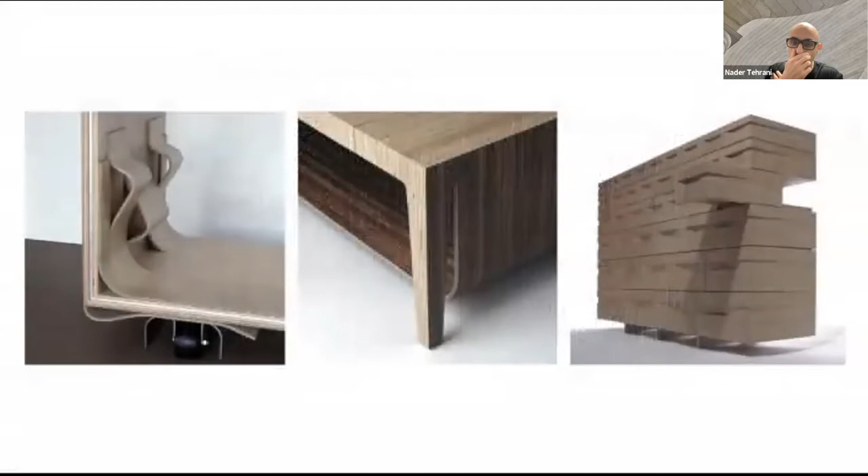My apologies, my voice is not very good today. I caught a slight cold.

In the context of our earlier work, we were working with wood blocks, stacked plywood on the one hand, almost as masonry units, but we were also working with the malleability of plywood, and the idea of plywood as a kind of laminate that is at once solid and malleable gets exposed in the way that in the bookshelf on the left, we can create a moment connection.

In the coffee table in the center, the massiveness of the aggregated plywood produces this stability of the wood in compression, while also displaying the suspended shelf underneath in tension below, and then more mysteriously, the shelving system, the drawer system to the right, where the structural system is embedded, concealed within the massive blocks of shelves, almost as masonry units.

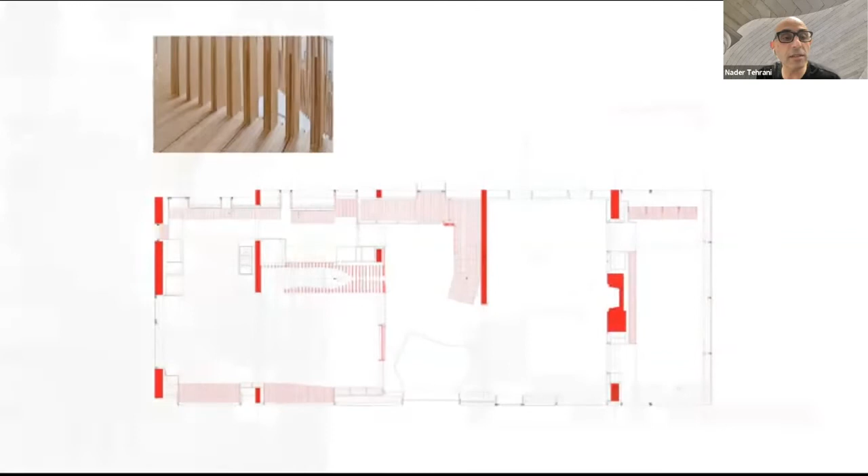As this gets translated to the scale of the house here in the Rock Creek house, we try to emulate the structure of the house. You can see in red the parallel lines that essentially run north-south are almost like party wall conditions that are then reinforced by the grain of the furniture and railing systems, essentially all running in the same direction, effectively doing two things. One, allowing the light and the sun to come from the south all the way to the north, but also blanking out the private spaces on the east and the west.

And you can see here very delicately behind that stair, a doorway to a master bedroom, which is sliding. Once the door is closed, you don't even see that it's there. This is not just a translation in section, but is part of our research. And that research happens in our own domain.

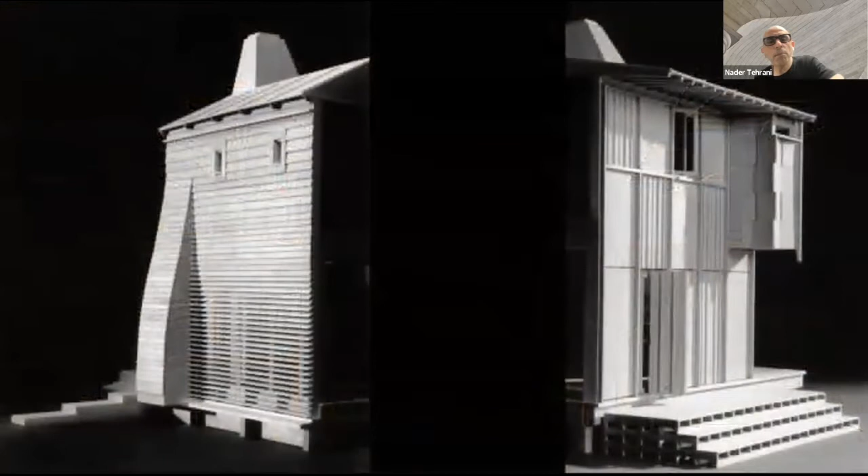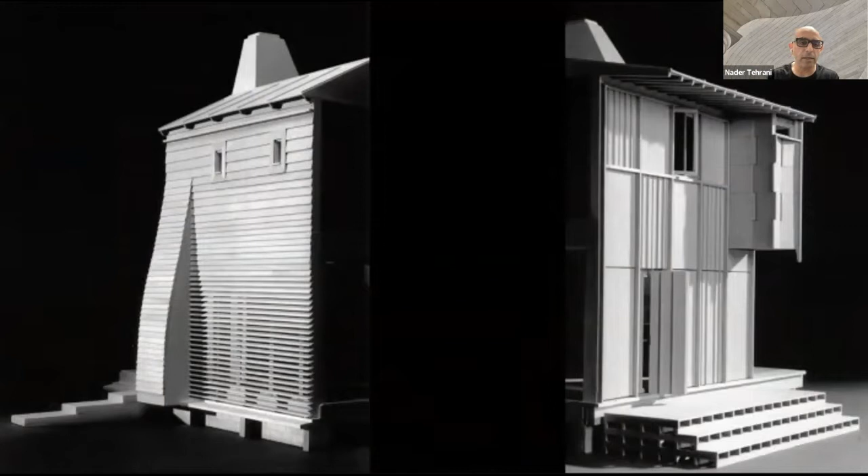But the grain, if you like, the tectonic grain that is produced by some of these structures was my reference to language originally. This is a model of the Mill Road house that was never built, but it conveys the different regional strategies that have been adopted by wood in the Americas, with clapboard siding on the one side and vertical board and batten siding on the other, using their grain to insinuate other possibilities.

In the clapboard, the idea of the clapboards rotating up to become shades to create transparency, drawing in the space beyond it. And in the folds of the board and batten, the idea that folding doors could make a similar transparency to the south. The actions that are part and parcel of these tectonics are a central part of our preoccupation.

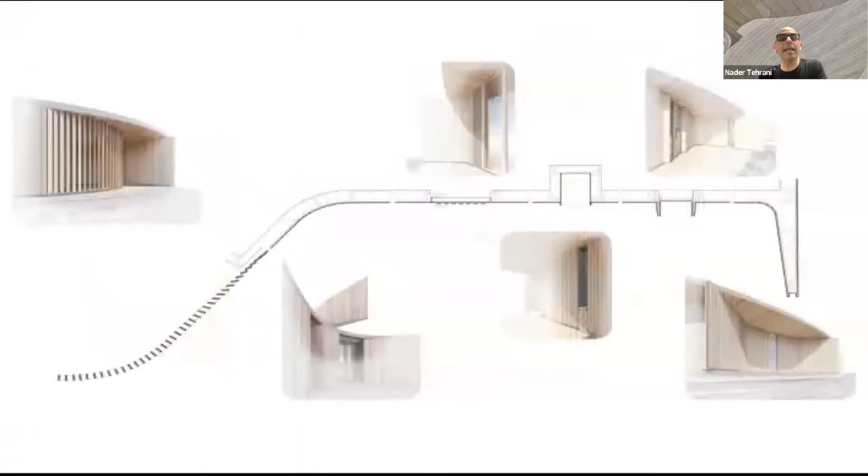That is, if we can do an architecture that doesn't have hardware, it is because the mechanisms, the elements of that architecture are what are used, or what are adopted in order to do precisely what we're trying to do. Here in the New England house, you can see the way in which the batten is peeled off to become the handle for the garage door that is concealed under this barn building. And so really the language of the part to whole relationship is what we work on.

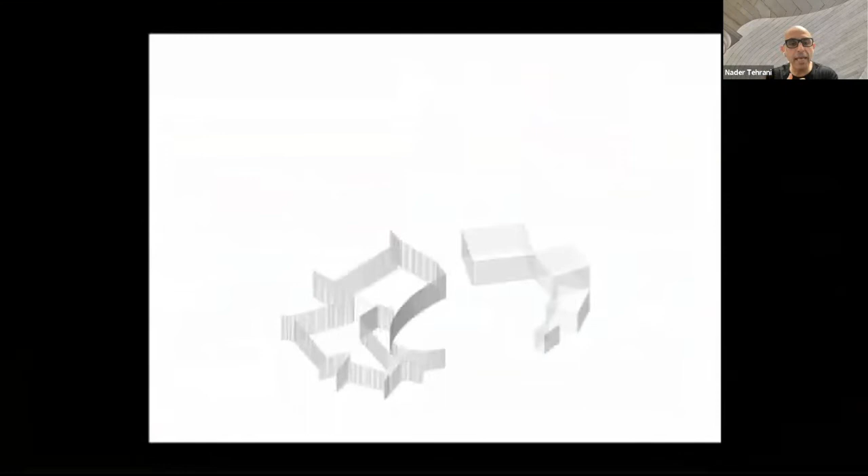The catalytic detail is what I call it, where you don't yet know what even the house or the building looks like, but you know the kit of parts and their relationship to each other that may be involved. So here in the New Hampshire house, the details were in a way conceptualized in advance, and then they became the vessel through which the container of this large courtyard building would be clad, and ultimately allowing for the framing of an important view through these tectonic elements.

And in fact, one inhabits this tectonics as one goes through the ruled surface of the entry condition and the portal. In other conditions, that cladding system is there to bring unity for the addition of another wing onto historic wings here in Beaver Country Day.

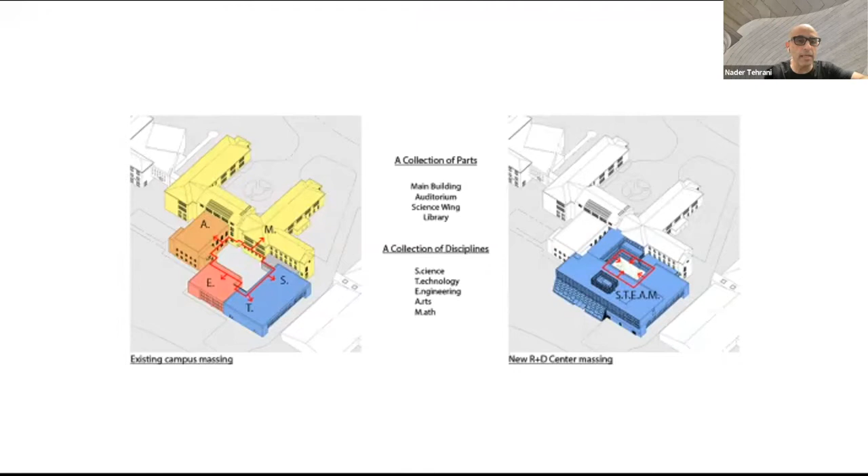So in fact, by working on a library, we were able to co-locate all of the different departments together, going from a STEM program with science into a STEAM program that includes the arts. And so in the second diagram, the idea of bringing them together comes with the imperative of developing a courtyard,

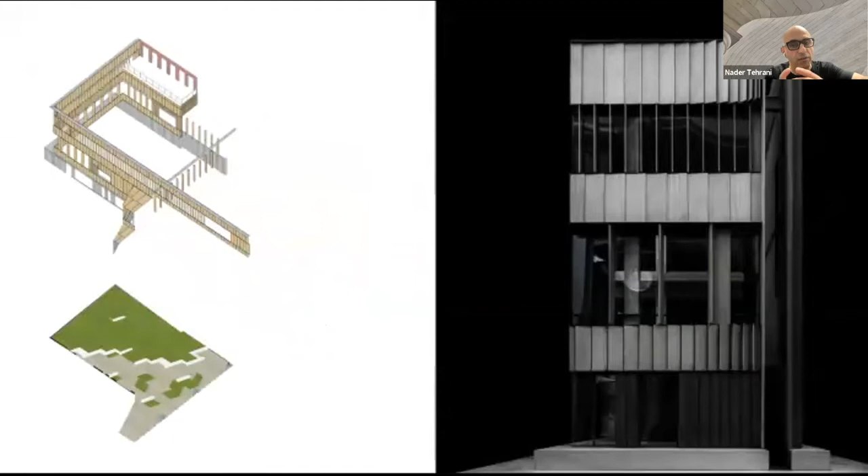in this case, where the wood elements essentially register the continuity of circulation that hides just behind them, exploding the library, as it were, instead of having a centered library, distributing the library between the sciences, the arts, and the other departments. The shingling then becomes part of the expression of these ramp systems, sometimes going clockwise, other times going counterclockwise. And the skin is a kind of an envelope that is a registration of this.

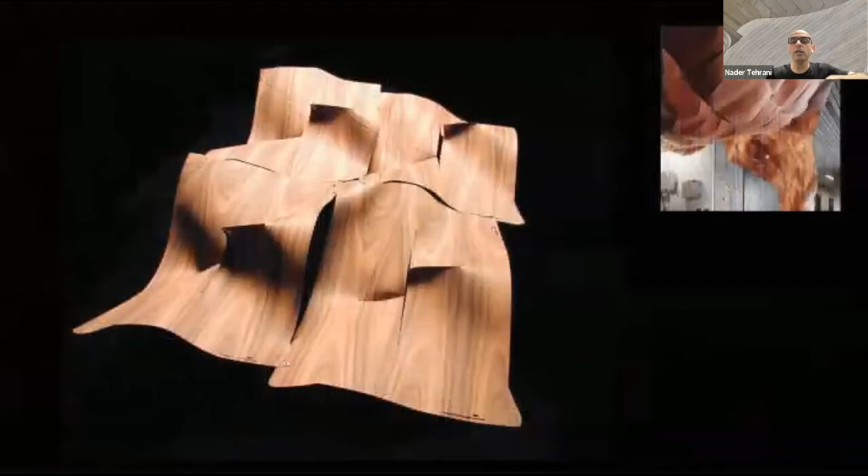Please look, as I will speak about this a little bit later, that the thinness of that laminate is as powerful to us as is the weight and the thickness in other circumstances. Here, a very, very early exploration of that thinness in the malleability and the pliability of immaterial ultramaterial, where we use the wood as the bottom chord of a bowstring truss that is able to span 20-some feet.

As you translate that thinness into the massiveness of mass timber, here you're looking at large LVL girders that essentially are 8 feet deep, spanning some 22 meters. The structure is inverted. In fact, the suspended studios hang from above and over the ground of the main hall. And so the tectonics gets lighter and lighter and lighter as you descend down into the structure.

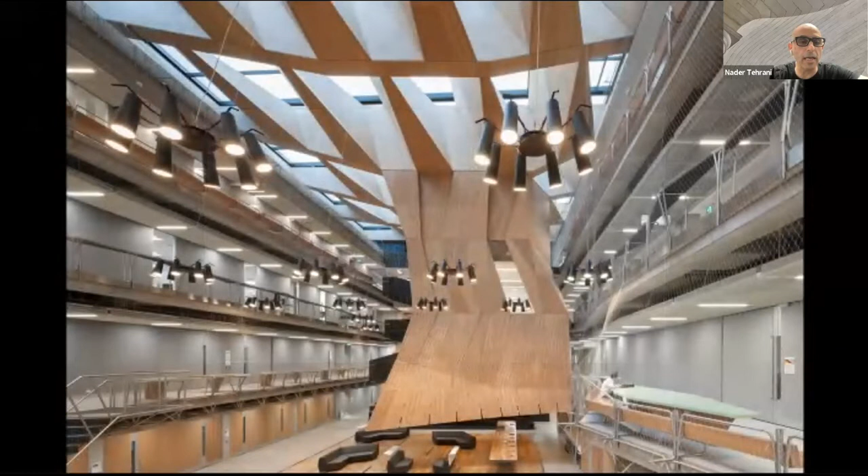The skylights essentially are a structural space, and contrary to a conventional building that is built from the ground up, where the rustication emerges from the base up, here the massive timber is reserved for the top of the structure with the thin laminar plywood at the bottom.

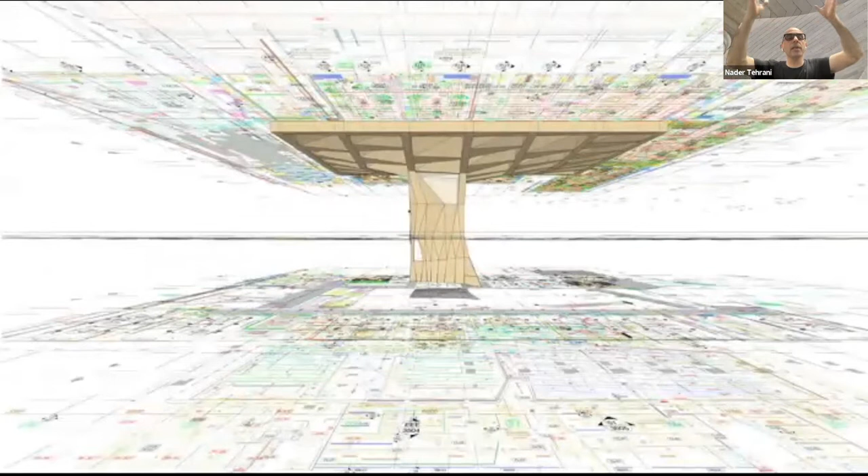The result of which is essentially a working drawing that builds the building up, suspends it back down, inhabiting spaces of the mass timber at the top, while also revealing the thinness, the acoustic thinness of those same skin conditions at the bottom in the lecture hall at the base.

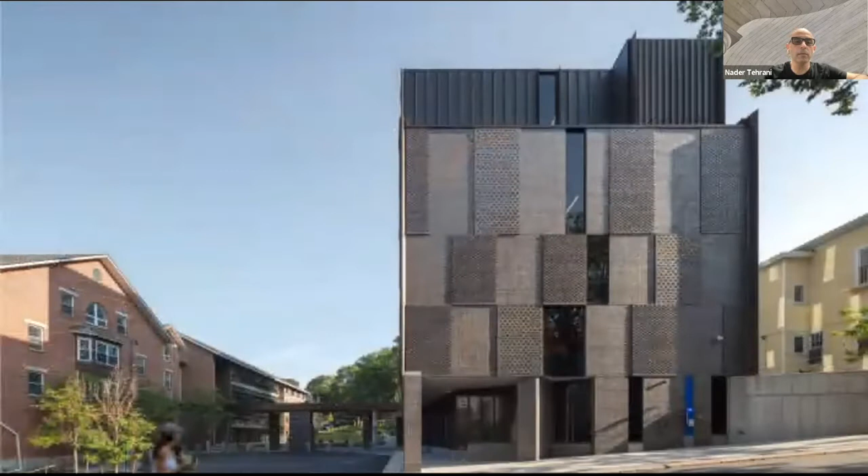Of course, not all buildings that are mass timber look like it. For the RISD building, the brick became a rhetorical mechanism to connect it not only to this history of the campus, but indeed the history of Providence itself. But the university took a big risk, not only in hiring us, but in asking us to deploy a strategy that was ultimately the greenest strategy that we could imagine, but without getting LEED credits for it

or any other kind of label. And so the contractors scheduled a 3-month framing period within which we could deploy not a pure mass timber strategy, but actually a hybrid strategy. The hybrid strategy entailed the collaboration of CLT panels in combination with steel I-beams. Why? And the reason for this is simple. Wooden beams would need to be deeper and thicker and are less penetrable for the mechanical systems.

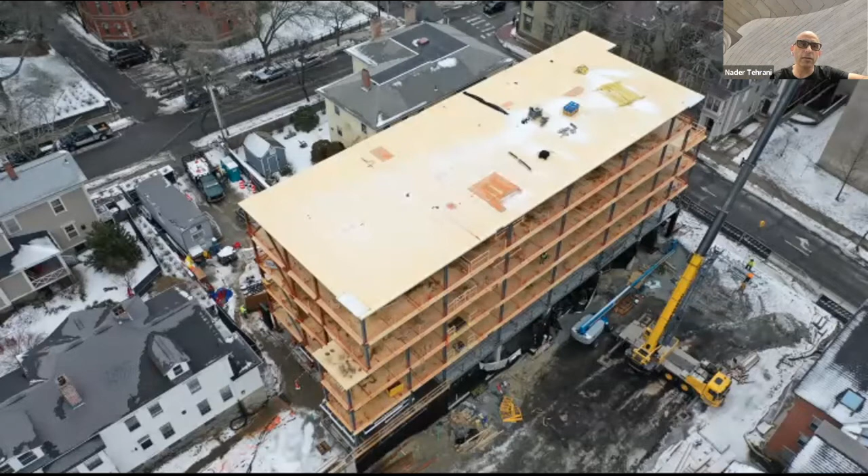And by doing a hybrid system, what we were able to do is to essentially prefabricate the entire building off-site and then just assemble it on-site, leaving no trace of construction on-site. The image you're looking at has no dust. It has no cuts of studs. It has nothing to it. Everything became pre-drilled and pre-cut, and then the light gauge framing was simply inserted into place.

The holes you see in the I-beams are then subsequently filled out with the mechanical systems, the sprinkler systems, and so forth. Now, the interesting thing about this story, beyond, if you like, the aesthetics of the wood becoming a protagonist within the architecture, is the idea that if the framing was scheduled for 3 months, it was actually completed in 1 month. And in a project that is IPD, integrated project delivery, it means that the profits were then shared amongst the various members of the designers, the contractors, and the consultants.

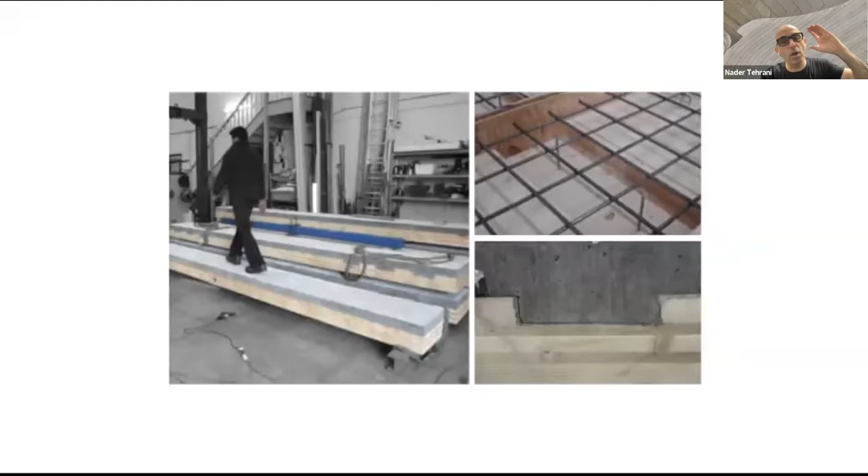The pairing up of CLT with other materials instead of steel is also very productive. In the context of the Melbourne School of Design, we were looking for a formwork that would then become part of the embodied presence of that building. So instead of demolishing plywood panels or aluminum panels, taking them apart, the idea was to use the CLT, insert rebar into them, and then put a deck of concrete, the combination of which produces the composite deck that would then become the ground of the atrium that I presented just before.

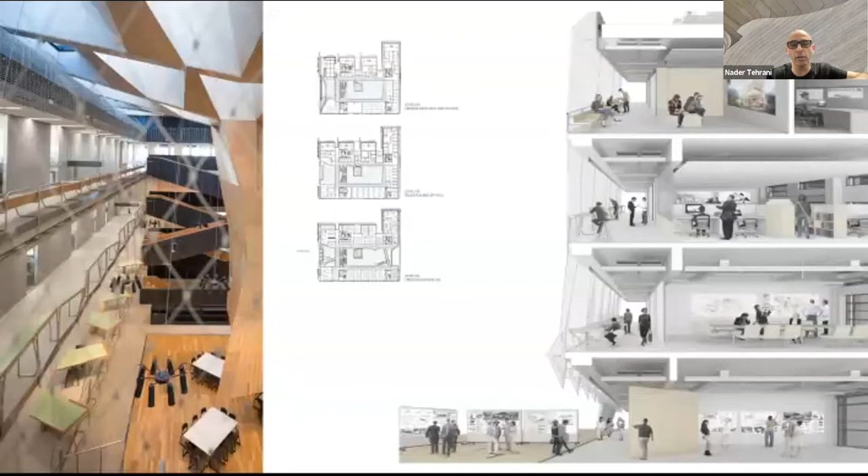Now, the emphasis on ceilings has been a preoccupation of ours for a long time, if only because the systems that we have to deal with are really a central part of the architecture of the 20th and 21st century, the hung ceiling. In one of our earliest projects, Mantra became an installation where we were able to manufacture ourselves this hookah den by essentially appropriating the means and methods, reducing the cost of this from $125,000 to $30,000 to redistribute that finance to the rest of the restaurant, as it were.

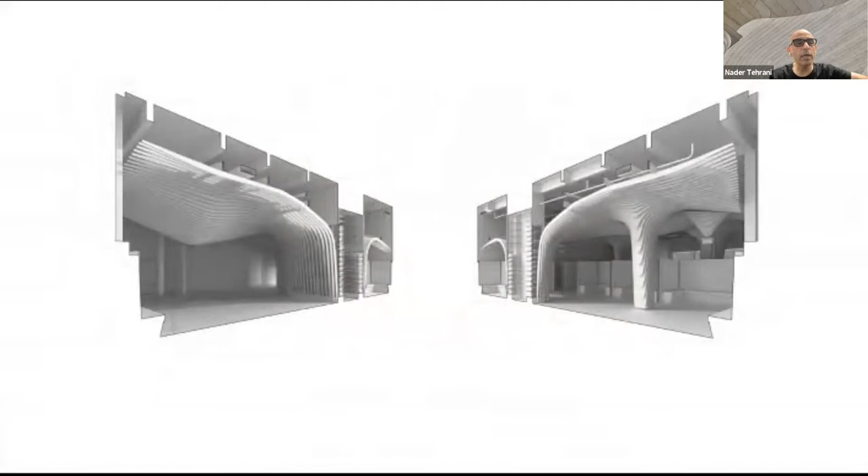But it was here where we discovered essentially the structural role of timber, its malleability to create space, and probing questions about how it could be used otherwise on larger projects. Some years later, when we were contacted to outfit another restaurant in South Boston that was already built, we realized that all of those systems already existed in the space. Mechanical systems, lighting, all sorts of structural systems were above, and our power was merely just to clad them.

And in that cladding, we were able to create a proscenium-like situation whereby the continuity of wood is convincing on one axis, and on the opposite axis, you see the artifice of this strategy looking up into the ceiling where the lighting is, into the wine room, and seeing the laminar condition of the columns as they appear as you walk by them, creating the kind of flexibility that the ground needs for a restaurant.

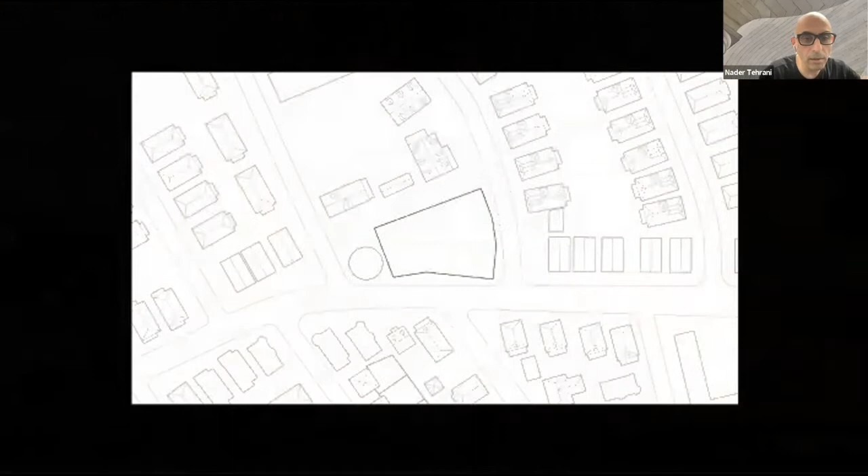What happens if this were to be conceptualized as a structural strategy rather than a cladding one? And this is the opportunity we got in Dorchester, where we were commissioned to do a single-story library in a local neighborhood that essentially required a new structure.

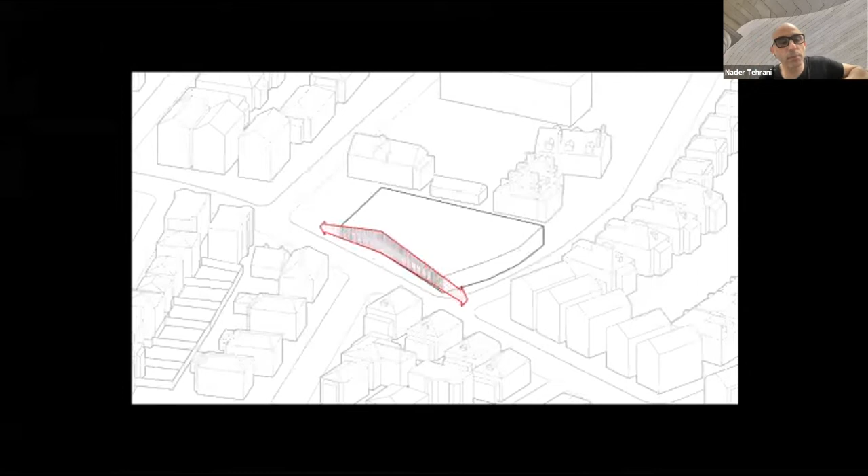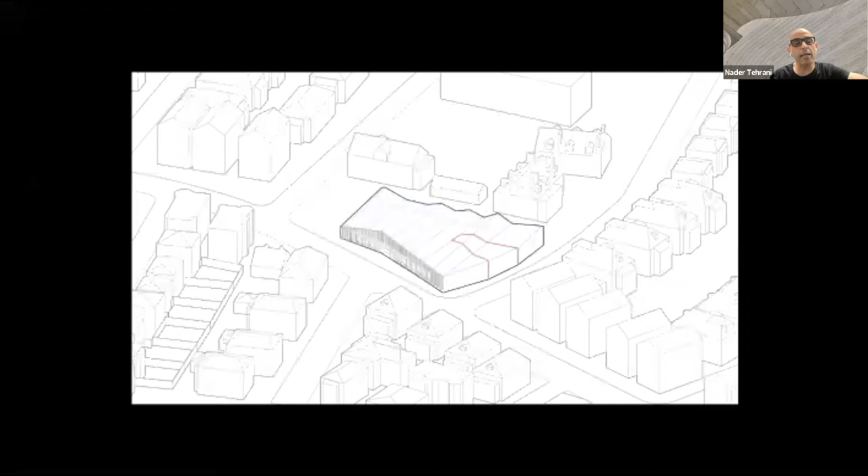Conceptually, the project revolves around a monumental pitch on the front facade that addresses the main street, while the backside emulates the disaggregation of the houses in the back, producing a hydrological condition where we can save all of the water for the site in a runoff drainage system in the back. We carve out space in the south to bring the sun into the building, taking that mass to the north to frame an existing oak tree, whereby the nature is a central part of this.

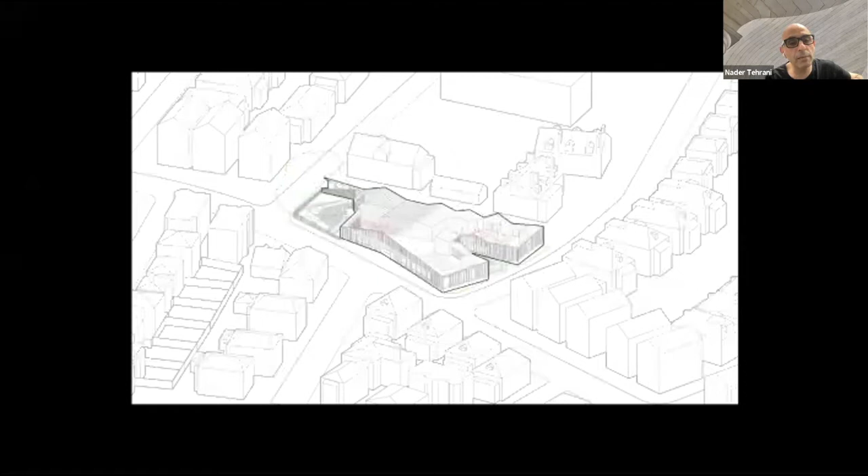There are 3 sectors for shelving, for the adults, for the kids, and for the adolescents, but the beams run exposed east-west, and they become the exposed mechanism that is the architecture of this project. It is the reflected ceiling plan that you experience as a kind of civic covering that allows you to walk through and frame some of the more important spaces of this project.

So as a kind of exposed shed, what you're looking at really is acoustic baffles, sprinkler systems, lighting, beams, and then repeat. And this undulation essentially caps each of the study rooms on one side of the plan while leaving the kind of monumental pitch for the great reading room on the opposite side.

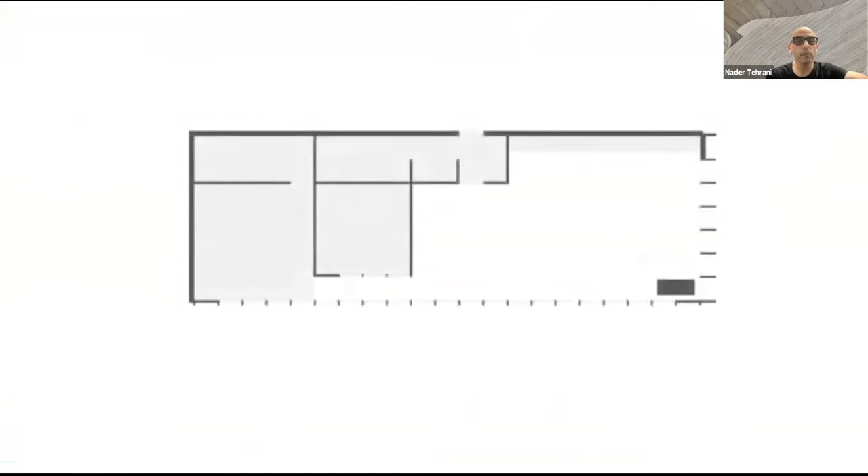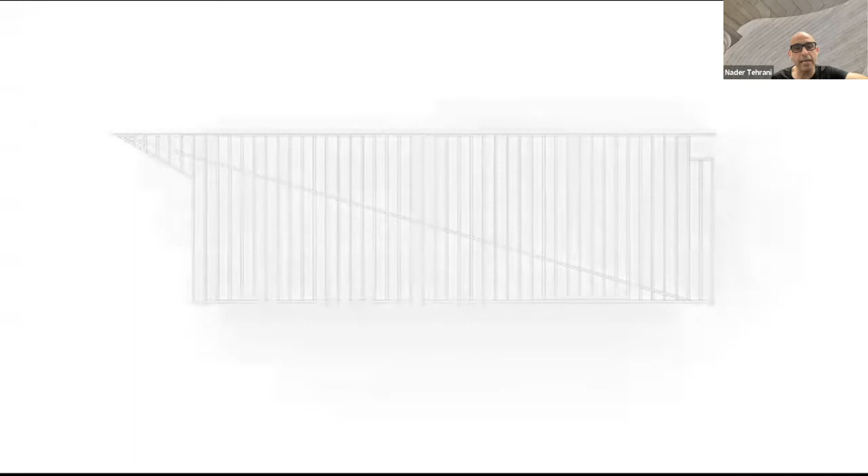A similar strategy was used for a house in Connecticut, whereby a simple diagonal on one axis divides the public from the private side. In the poché, as it were, is where the bedrooms, the bathrooms, the kitchens are. And in the opposite diagonal, essentially the structural system that goes in the opposing direction.

Here, behind the bookshelves are all of the spaces in black, the dark spaces of the bedrooms, bathrooms, the storage rooms, with a kind of a long lofted area that opens up to the western view. Again, a system that is ostensibly exposed as a raw structure, much like the Adams Library.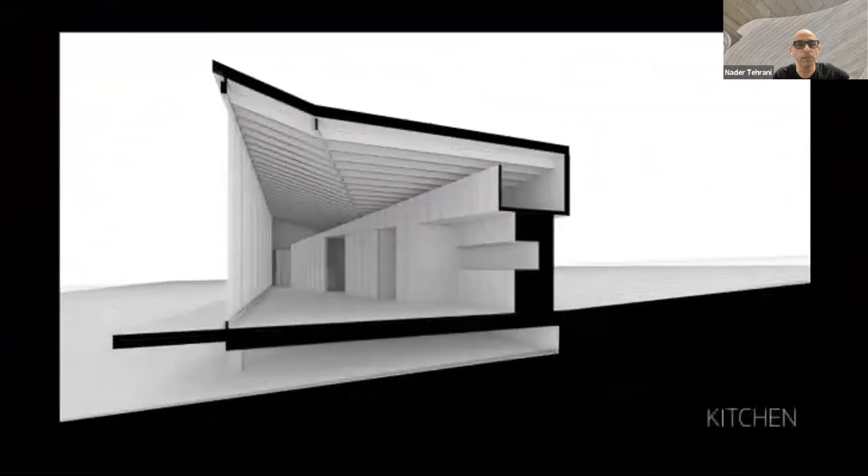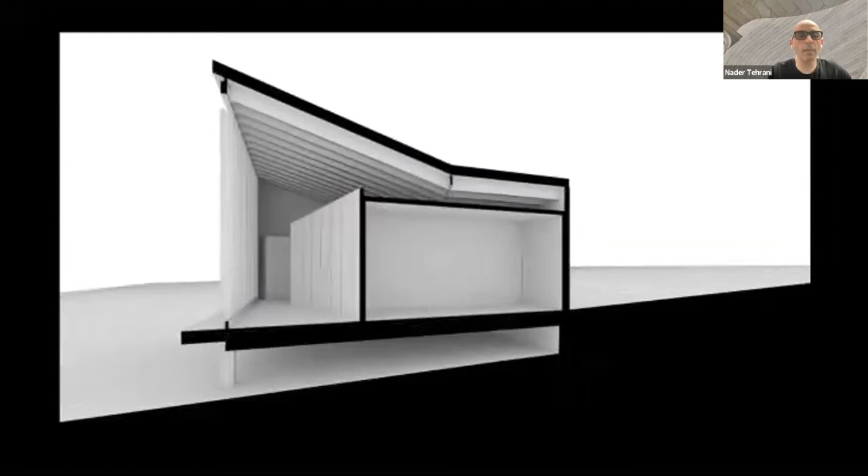Conceptually, the idea of this house was to program it in such a way that rooms are dispensed with, but their attributes are not. The living room described by the fireplace, the kitchen by its corollary, counter or dining room, the entry vestibule, essentially with the concealed space of the closets, the library as an extension of the long bookshelf, and finally the bedroom in the final chapter, completely concealed from the rest of the house.

Here you see the opposing view and the way that a very modest structure opens up to a double height space on its end, while framing some of the dark spaces laterally and the various attributes.

So with this, I take you to the Venice Biennale, which is composed of essentially 4 projects, but they aim to look at the problem of housing. The question of the exhibition was, how will we live together? And we took the question of living together quite literally, with the problem of housing being one of those things that is central not only to the United States, but in many other regions.

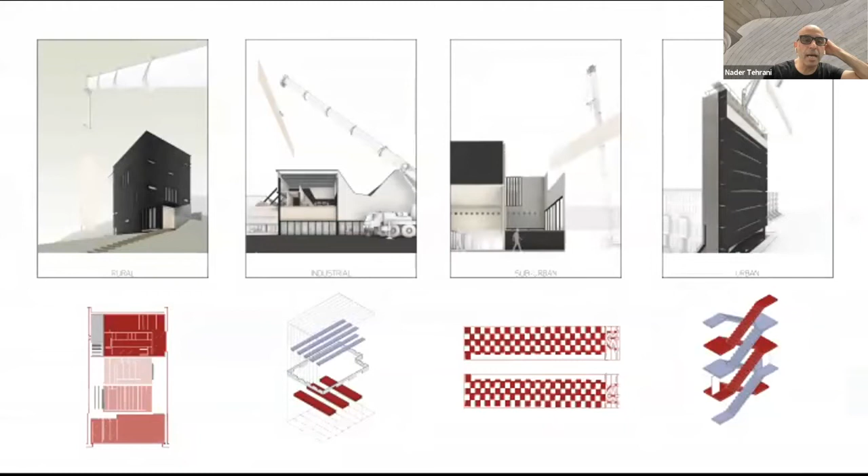We looked at urban areas, we looked at suburban areas, we looked at rural areas, and we looked at industrial or post-industrial sectors. And this became an excuse for us to deal with various building types. On the right-hand side, a slab tower. On the left-hand side, a rural villa, which has now become an apartment building. And in the middle, 2 mat buildings that are essentially either dense housing or a combination of work-live spaces.

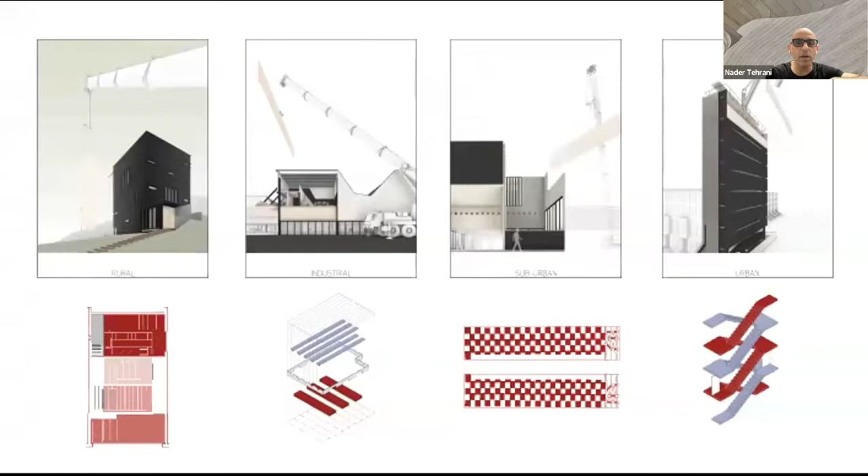And so I'll try to go through these quite quickly, but the timber tower has to do with a challenging of the code with overlapping accommodations. It's located right in my backyard in Boston, and it works with the premise that a lot of urban corridors are already upzoning. And by upzoning, they essentially double their square footage and stack one row house on top of the other, producing what is ostensibly an anomalous condition, like you'll see here on Commonwealth Avenue.

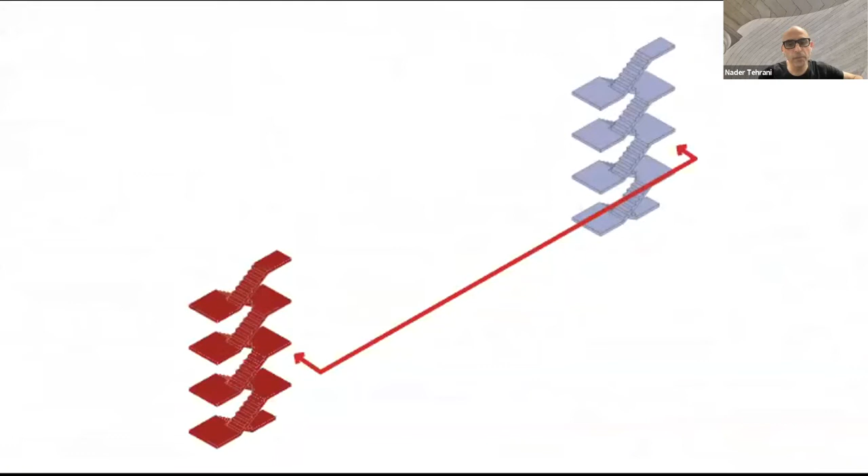But in our case, refashioned, taking what is a legal requirement of 2 means of egress and pairing them up together in the context of a double helical stair. That is one challenge to the code.

By bringing them together, you can create a footprint of 2 units that are nested in relationship to each other, using the stair not only for a fire stair, but actually for everyday use going up and down in your own loft, because the loft is 2 floors. What does this mean? It means that the fire stairs are on door openers on a regular everyday basis. And when there's a fire, they close and open only the internal doors.

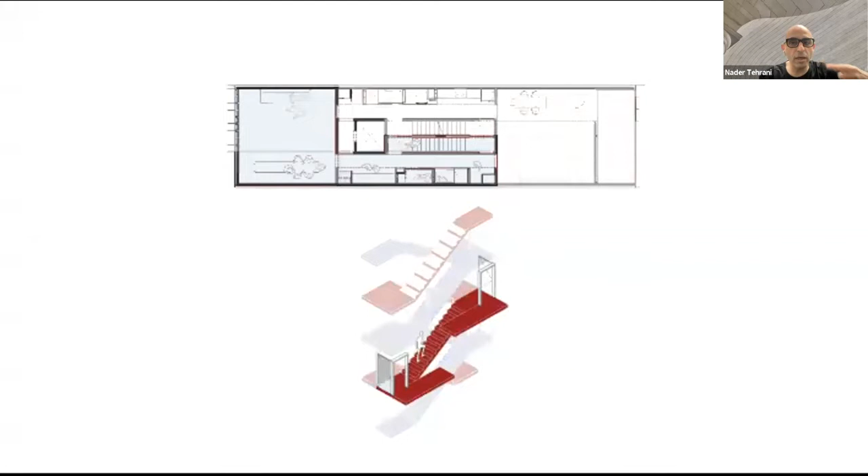So the units are 2 L units that are nested into each other, with the staircases becoming essentially an extension of the furnishings of that interior, with storage nested right next to them. This is the space that becomes part of the household. The idea of this, of course, is that it's entirely of mass timber, and therefore the entire building is composed of beams running the length of the entire building.

So you're looking at the facade with long mass timber elements that are over 60 feet long, and the windows are the result of mere carvings into the bottom face that create ribbon windows as one looks out from the side views where the workspaces are, where the bedrooms are, and where the kitchens are, leaving the ends for the large living rooms, loft areas, and so forth. And the idea is that this could be essentially structurally erected in less than 3 months.

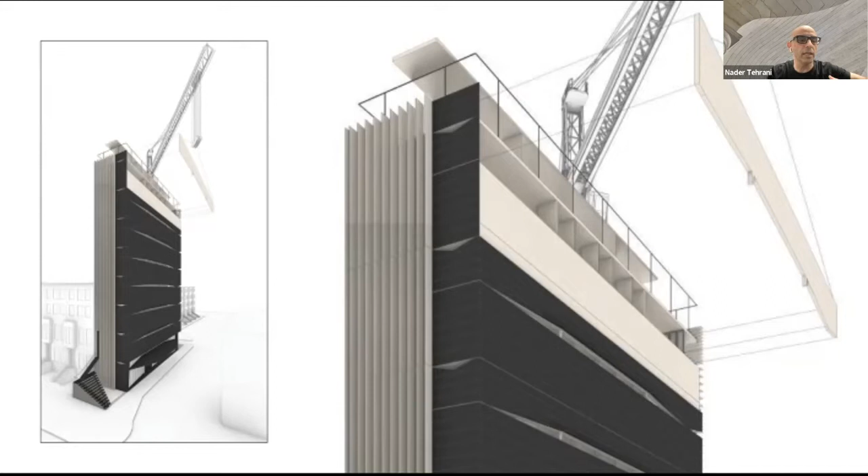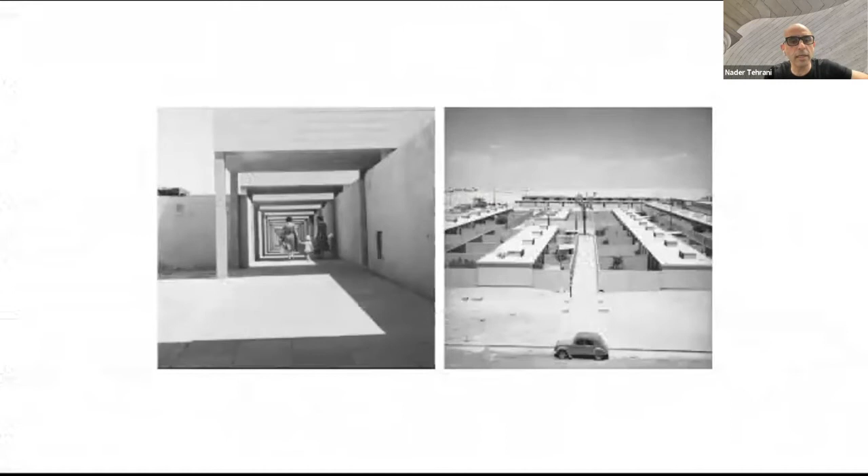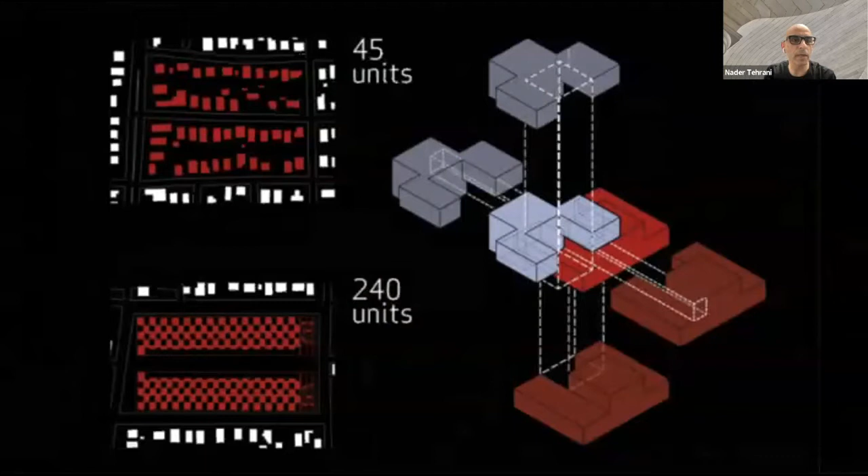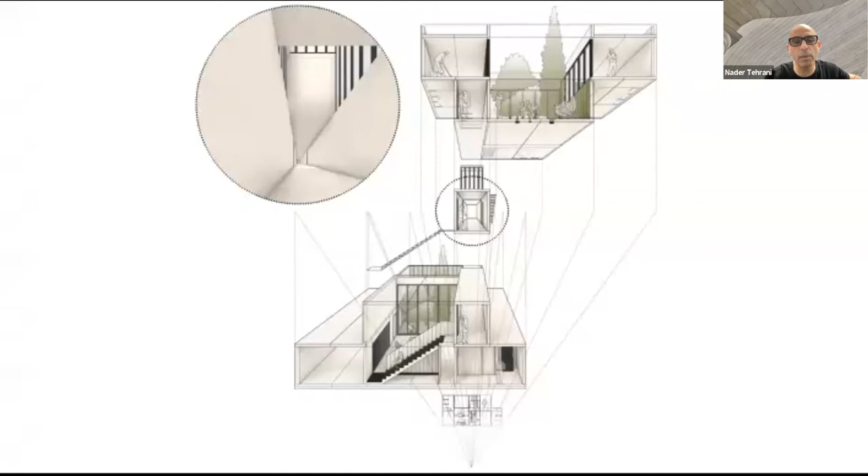And the principle of this is that the circulation of the mat units revolve around one corridor that is the common corridor that tethers you to go down and up from there. So there's one courtyard in the up side and one courtyard in the bottom side for two different units, with the endless corridor in perspective framed by the circle. The upper unit has its own autonomy, and so it gets natural ventilation and natural view to its own courtyard, and the bottom one in a similar way does the same. They have no visual contact with each other, but completely open and porous relationship to their own gardens.

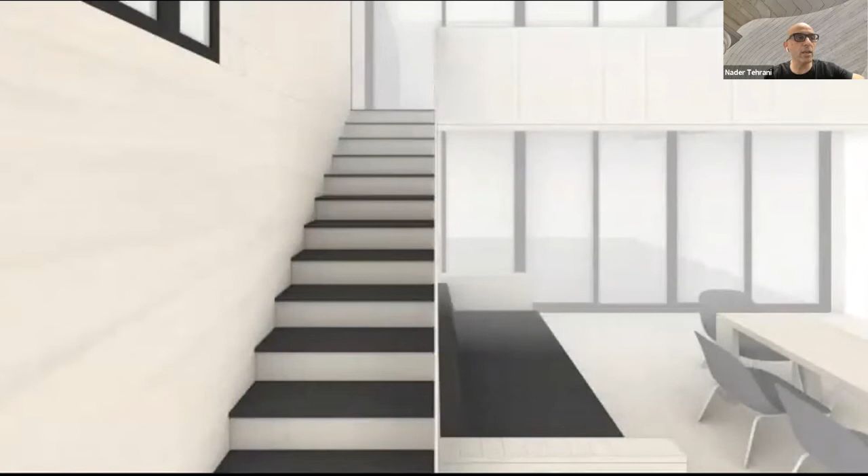In turn, because of their planimetric and sectional distribution, units can be expanded by way of these boardwalks to penetrate each other and become unified in a similar way that we showed in the previous scheme. So you can take 1-bedroom units and pair them up with 2-bedroom units to create 3-bedroom units.

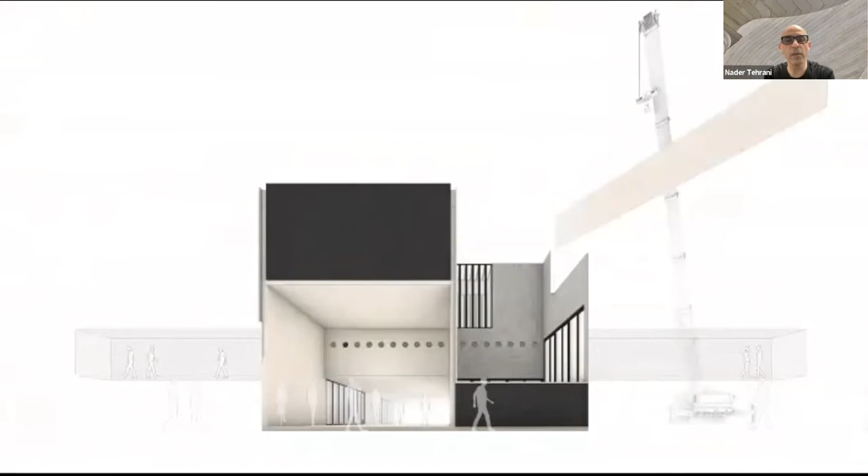Some of this then refashions itself in the context of hybrid zoning, where you have Home Depots, Amazons, and other kinds of Costcos, these large supermarket structures that can then be inhabited through a kind of insertion of large-scale mass timber units. This hybrid zoning is already something that's visible in the Route 128 area. And we've looked at various warehouses that are already undergoing transformation.

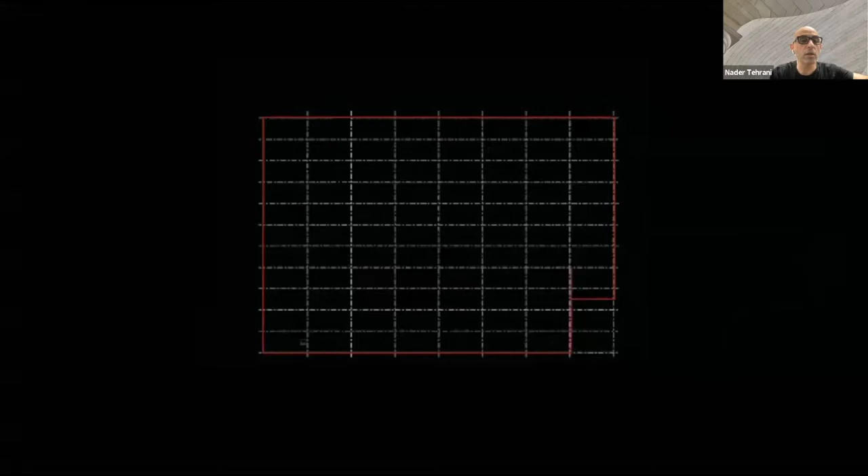And their model is really challenging essentially the parking lot as the basis for transportation. Some of these areas are becoming pedestrianized, and the spaces for parking are becoming structured. New buildings are being inserted in there, and then a new life is born out of the interiors of these warehouses. The warehouses come with their own grids, and one can imagine that one inserts a workspace grid on one axis, and then a live space perpendicular to it.

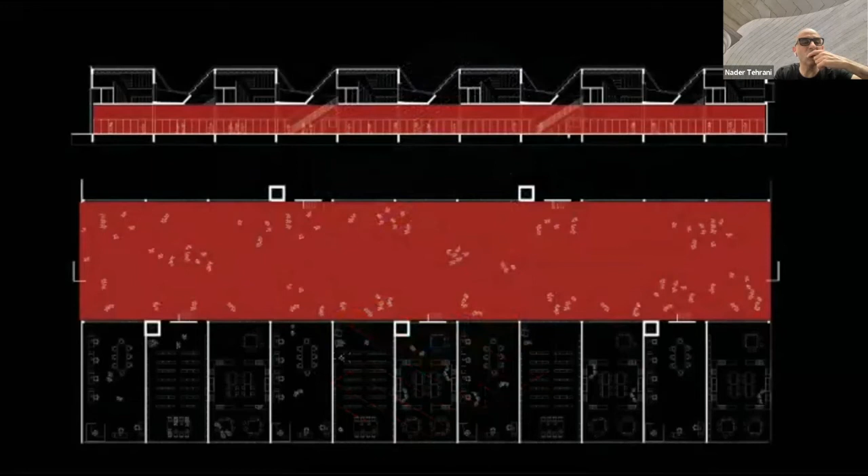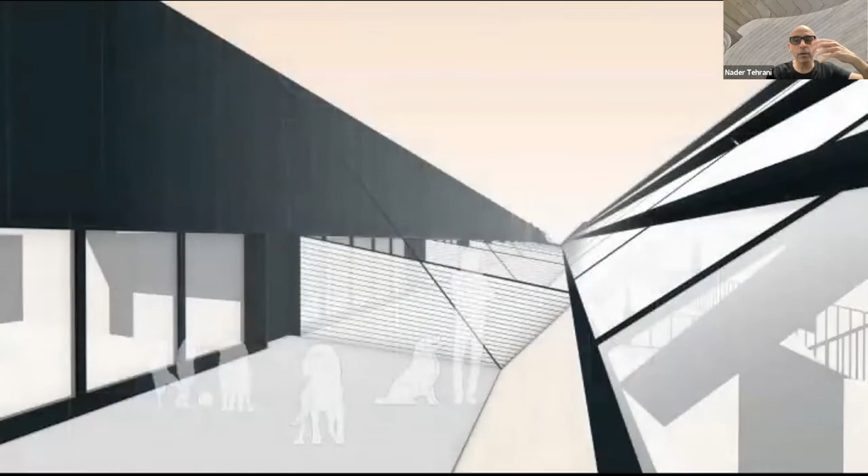And by doing so, allow the passage of light to come down into the spaces below by carving into them, essentially, and allowing these two modalities of live workspace for artists, for light manufacturing, to coexist together in these spaces. And so a hustle and bustle on the lower level, but then the respite of the home loft, which is again flexible on the upper levels, which are nested into the roof conditions where you're inhabiting the skylights that look up and look down at the same time. With the loft units essentially being incredibly dense in terms of a strategy that is able to maintain the footprint of the Costco intact.

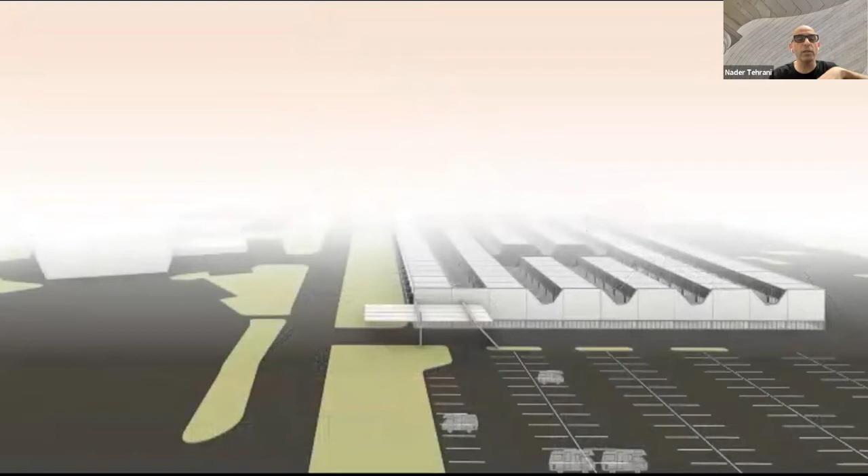The final one is, of course, the house in the rural area, which is no longer a house, but rather an alibi for introducing density into the rural area, essentially a miniature apartment building. It's called rural density, on a very remote site that is not more than 10 minutes from the train station that goes to New York City. So you're in the middle of the countryside.

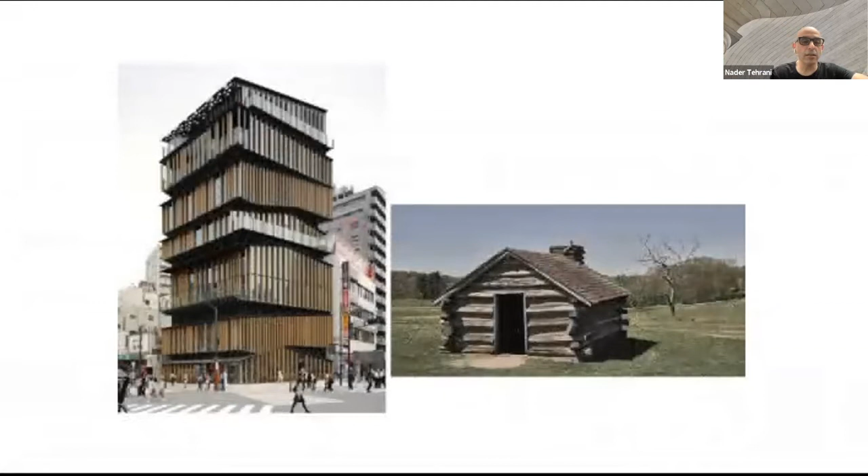And for people that in the pandemic were needing to go to work, they would go once a week, but spend the rest of the time at home. And essentially the concept is of taking the log cabin and stacking it vertically, for which there are many precedents that we looked at, but essentially they revolved around one simple principle.

By using one staircase, one is able to create access to each of the 4 levels, and in each of the 4 levels, the floors are almost identical in their plan. What is important about these 4 levels is that there's no wasted space. Under and over the staircase are where the bedrooms are, the toilets are, the closets are, the showers are. And so the poché, as it were, is fully inhabitable.

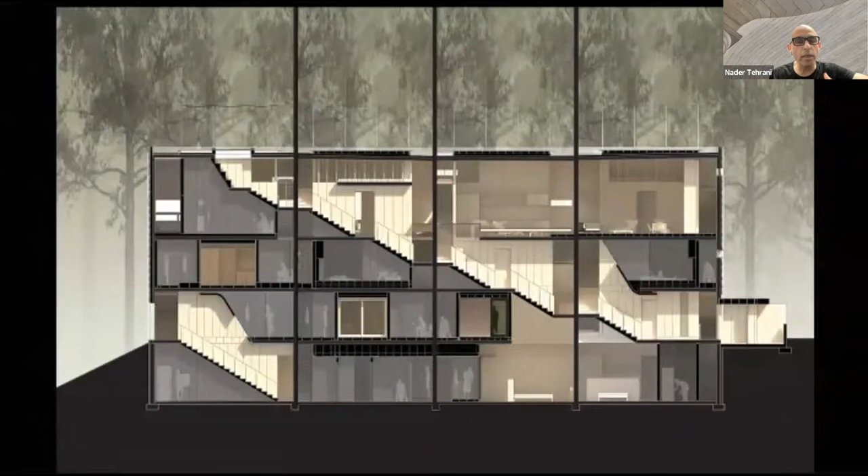Within the context of this single stair, one can imagine a single house owned by one family. You can have an in-law live there at the lower level. You can rent one space out, or you can just make it an Airbnb with many different people occupying it.

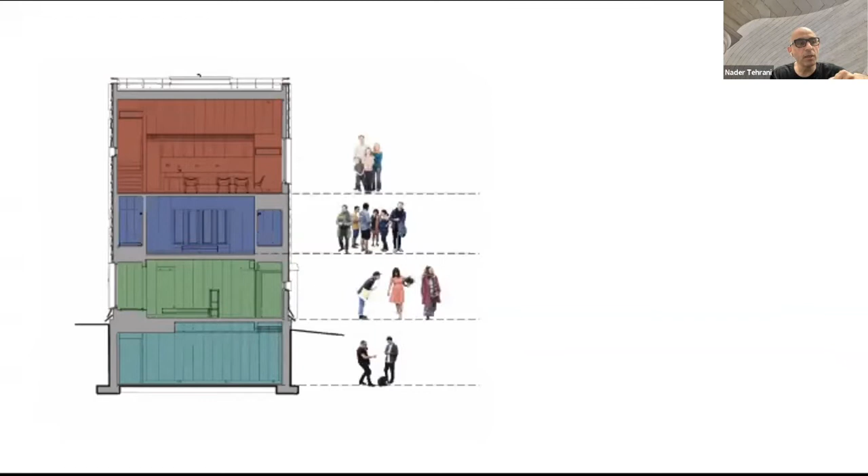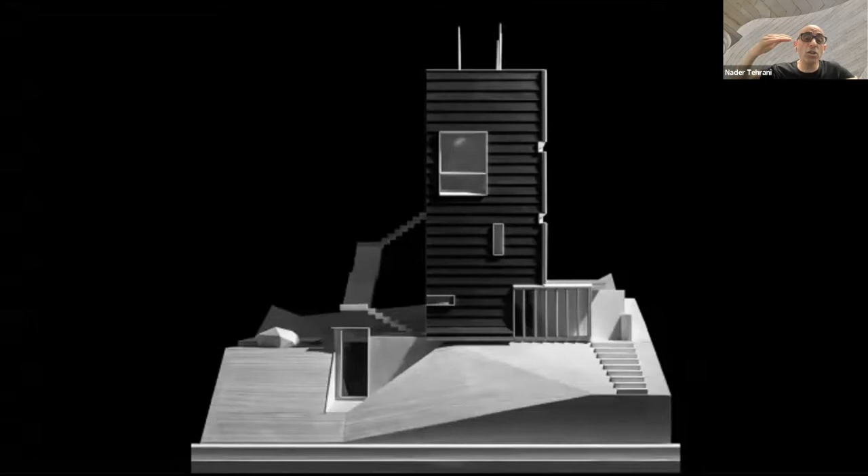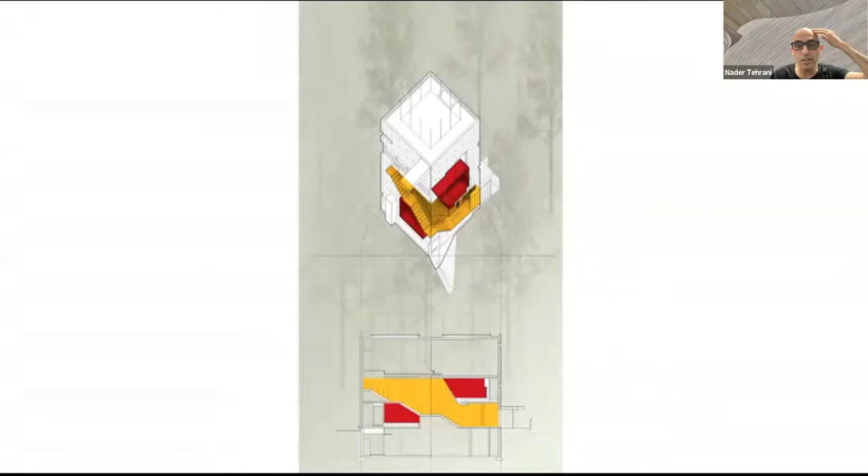But essentially, the cladding is a cloak, a large-scale shingle system that operates essentially at the scale of a ribbon window, inserted into key points of the ascent as you come in from the bottom and go to the top. Again, the yellow is the circulation, the red are the bunk beds and the showers. Each floor has only one window, with the corollary windows that are at the landings and in the showers and in critical spaces in the toilet.

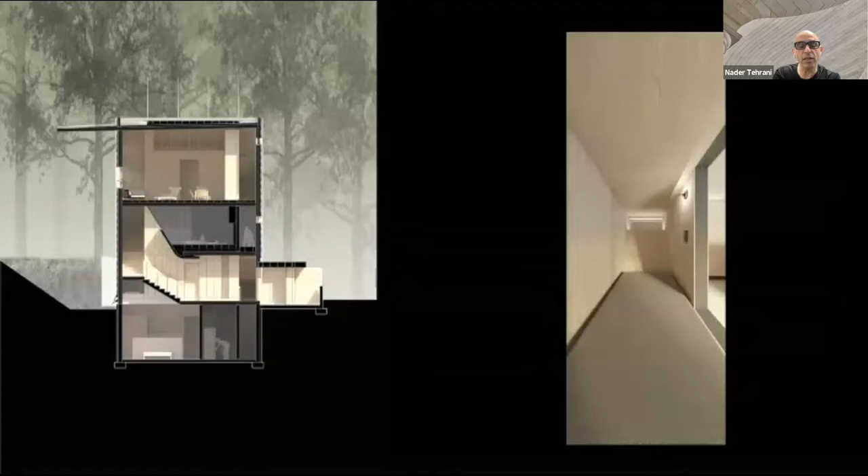The ascent from the basement going up has its own independent access if required. The front door is actually at a middle level that brings you into a single bedroom unit that is ostensibly independent in terms of its kitchenette and other uses. And the poché spaces are where the bunk beds are here, with a slight window reveal that looks down into the stair. The 2 opposing sides of the same bunk bed here, the stairs looking down with the bunk bed behind it.

The bedroom itself, rotated here, is essentially a full micro unit with the bunk beds to the right and the left, the major bed to the center, a large view that looks out, closet, kitchenette in the background.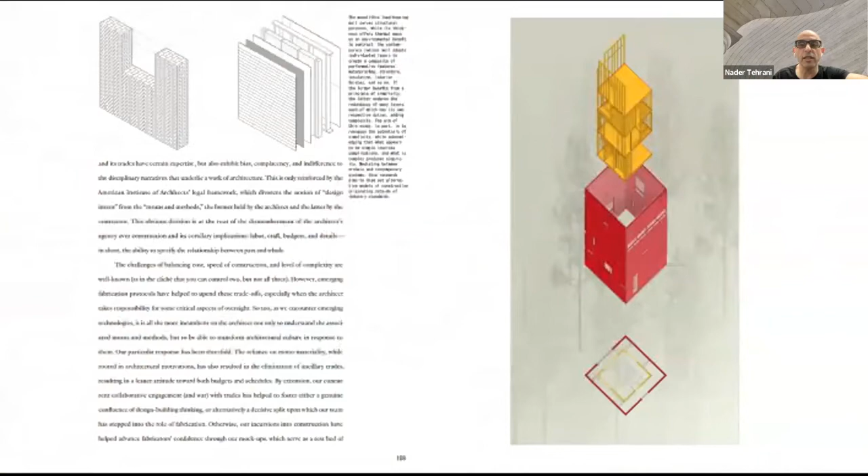And then as one ascends to a loft area at the top, essentially what we call the living room, again, more bedding up there, but essentially the revelation of the studs on the inner core reveals, in fact, that the CLT couldn't work on its own, because the inner layer has a hollow wall within which the mechanical system, the plumbing system, and whatever services are needed are then revealed within that laminar space.

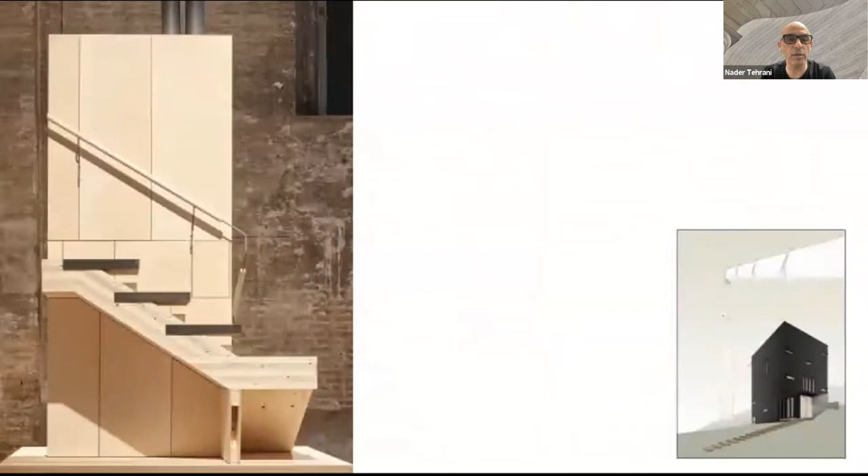Here you can see it, the dividing wall between the bunk bed and the main room is where that sandwich wall happens. In other words, the CLT, in order for it to be a viable notion, needs to be hybridized with the stud wall in order for them to reinforce each other. Here, the mock-up of that unit in situ, and the entire thing coming together.

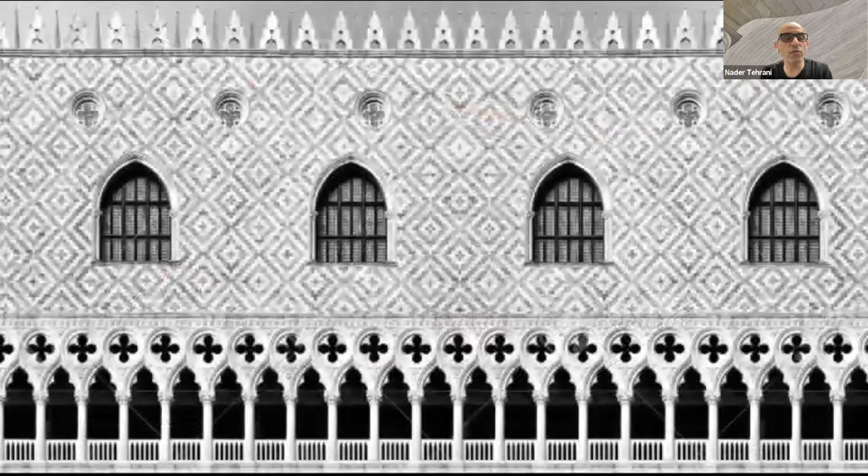With this, I will go to only the last chapter, which is the Giardino delle Vergini, where we were able to exercise an installation that was a gateway to their gardens. And within the context of this gateway that made reference to the iconographies of Venice, we tried to do a project that was about CLT, carving out of it a grain that was structural. And this structural grain gained its logic by forming structure on the diagonal.

Let me see if this works.

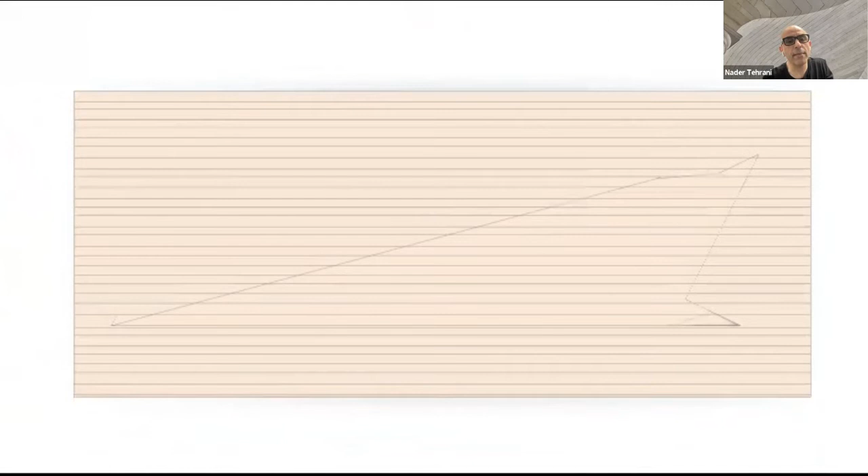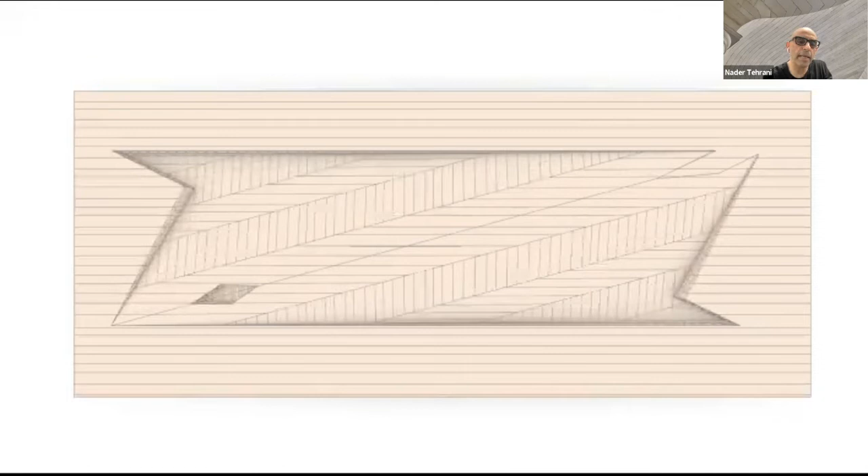Let me know if the sound works, but essentially this illustrates the way in which cross-lamination works. It shows you the way in which we carve on the diagonal, bringing out the grain of the cross-lamination in two directions that are then subsequently punctured, penetrated by the columns that connect the deeper section of the canopy as it goes around. Other pieces of other canopies are nested into them on the sides.

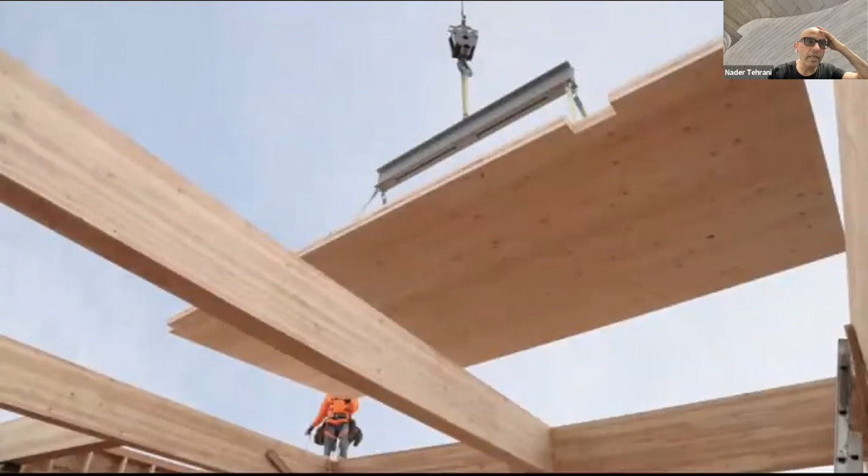Obviously, with labor and routing time being exorbitant, so were its costs. And so we needed to go back to the basics. And the basics were, we asked ourselves the question, how can we make a gateway out of one plank and the least amount of time cutting?

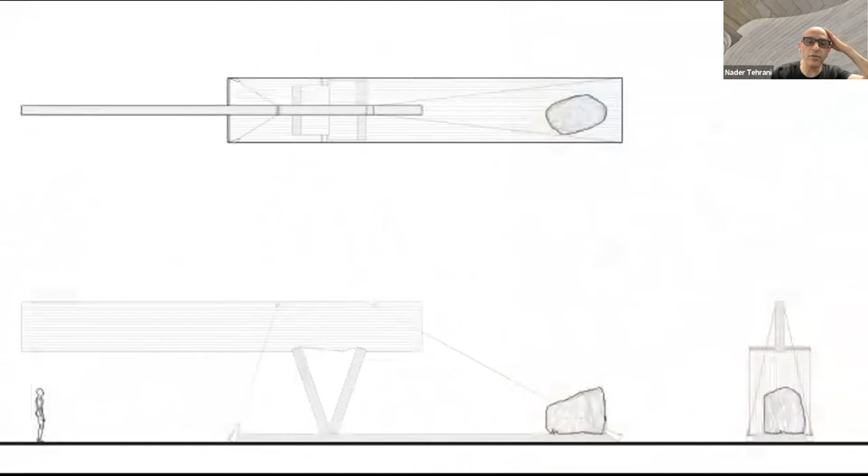We were looking at the symbol of St. Mark's, Pax tibi Marce Evangelista Meus, the symbol of welcoming to Venice, with a structural system that essentially takes out of one beam and makes in it a foundation, a support, and essentially a cantilevered threshold. The support contains the message of welcoming on its inside, and effectively the gateway straddles one side from the arrival of the boat from the water,

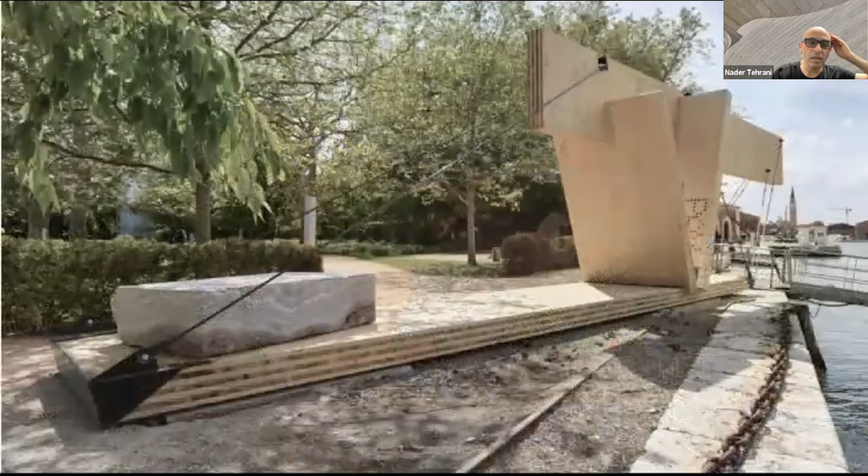demonstrating the absolute and radical limits of the cuts that we were able to ensue onto the plank and install it, of course, in less than a day, with a counterweight to measure its backspan and some steel pieces that would then embed themselves within the context of these laminations to hold them stiff. You're not only holding this up, you're also holding it down from winds and lateral loads.

Yes, I can. And to do that, sorry, I would need to share the screen again. And let me see if I can. And also, I don't know if you went into detail about fire protection, because the two stairs are kind of sharing a wall.

Yeah, I'm trying to annotate. Where's my annotation? How come I can't find annotation? I can't find the annotation right now. Kaya, if you can allow Nader to annotate, I think you have to give him rights. I actually was kicked out of the meeting because of my internet. So I think Alicia's gonna have to do that.

Okay. Here's what I'm gonna do. In a typical unit, you need two means of egress, one this way and one this way. And on the opposite side, this way and this way. And both of those are straddling two different levels, right? But the key to this is that there's a sliding door here and here that needs to remain locked on an everyday basis. So the doors that are inside your unit are remaining open on an opener, as it were. The two sliders are locked here.

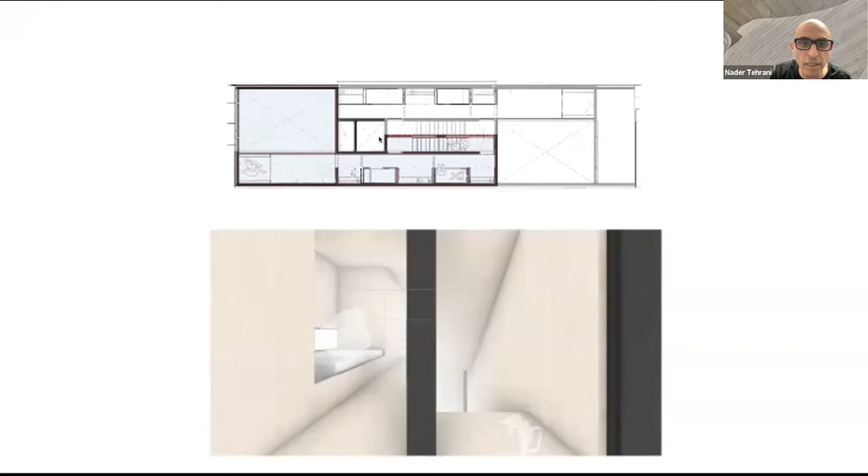When there's a fire, the door closers here close immediately and the sliders slide back, and this becomes one continuous loop that goes down like this. And then the distance from your diagonals is minimal. These are not large units, but essentially they bring you to your two means of egress within the core of the building. The elevator is here to the side.

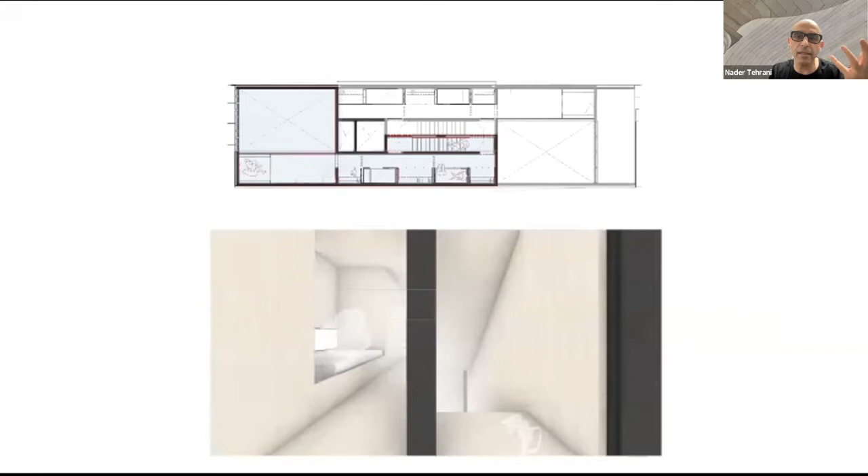I don't know if this is convincing or not. This is an act of speculation, I would say. We didn't take it all the way through code consultants and things like that. But the prospect of doing a double helical stair is not new. It's something that we have all seen before. The question of how to do it under these circumstances means that the net to gross area of the building is radically efficient. Yeah, that answers it.